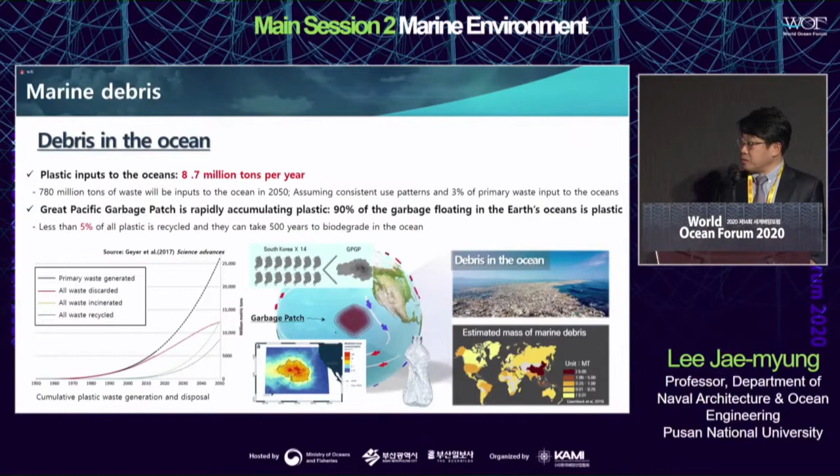I think you may be very well aware of the challenge of marine debris. Annually, 8.7 million tons of marine waste is generated, and more marine waste is accumulating in the Pacific Ocean. The biggest issue is that marine garbage is not biodegradable. We need to come up with a fundamental solution to this issue, otherwise we will face an overwhelming challenge.

This slide shows negative impacts from marine debris. As you can imagine, we have environmental issues and economic issues. Most people are concerned about microplastics. If wildlife consumes microplastics, devastating consequences will happen according to current reports. Indirect consumption of microplastics exceeds 800 MP, which has dire consequences for humanity and wildlife.

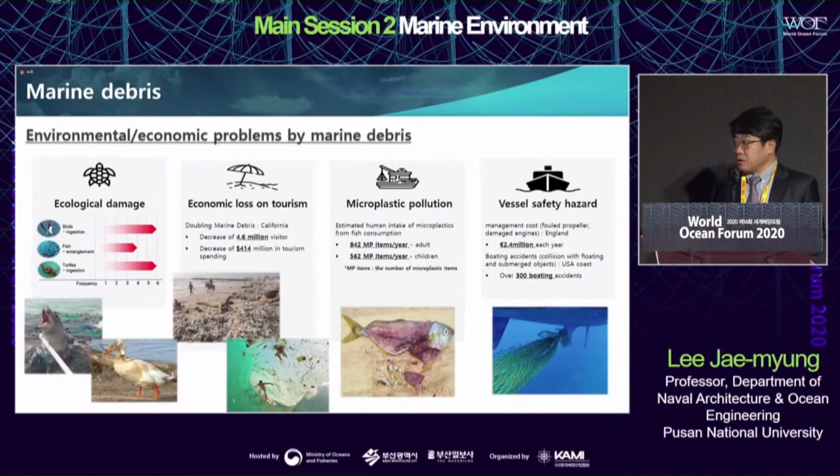Marine debris also has a negative impact on vessels, and it can have a consequential impact on shipping routes. We used to use a marine debris disposal process to clean up waste. Inland, the waste, after being collected, will be buried in landfills before being incinerated. For now, less than 10% of collected ocean garbage is recycled.

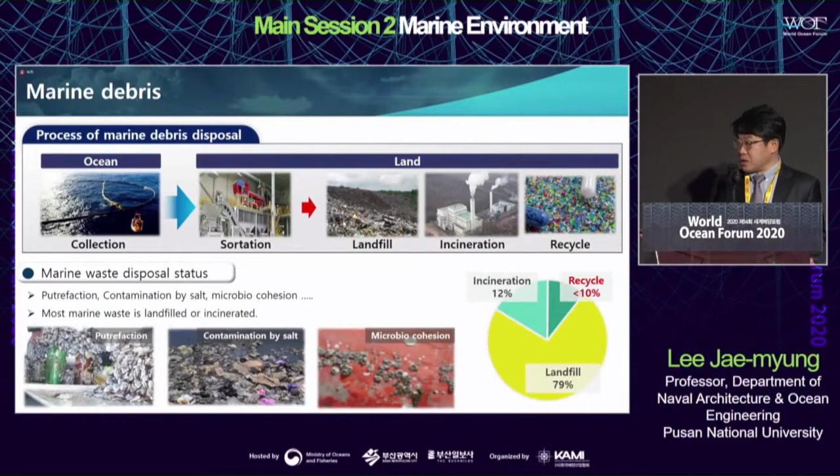Up until now, when we discuss the marine litter challenge, the most frequently used method or solution was collection, and it was land-based. For example, ports and streams have been the places where marine debris and ocean garbage have been collected. In those places, there have been some global systems or technologies in use, including unmanned systems, and there have also been projects on this issue.

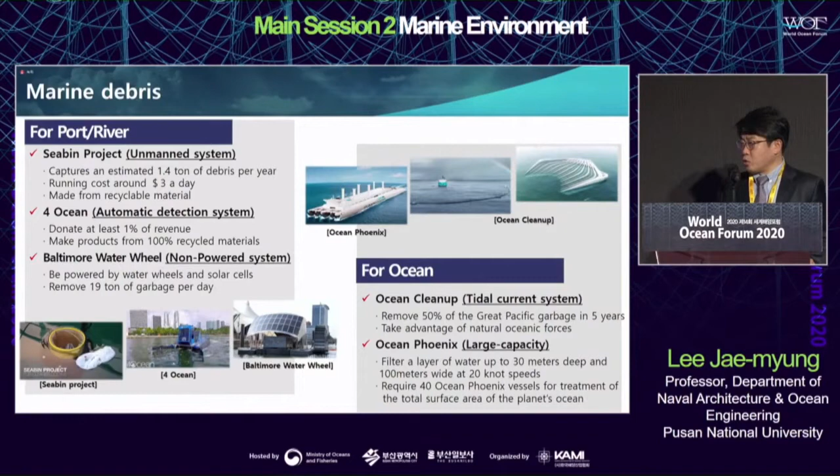For ocean cleanup, there is a foundation with the same name, Ocean Cleanup, and the wasteland in the Pacific Ocean has been a place where we collected ocean garbage. But as I said on the previous slides, most of these methods have focused on collection rather than disposal. Collection was their primary purpose.

Yesterday in the keynote session, I made this suggestion. My suggestion was LNG and hydrogen hybrid ocean cleaning ships, and these ships can be deployed to collect ocean garbage.

Ocean garbage and marine litter face three challenges, as you can see in the box at the top of the slide. The first is volume. When ocean garbage is brought in bulk, let's say you grind it, when you compress it, you can increase storage efficiency by 7 times and 16 times respectively. So this is how you should do it.

You should think about how you can efficiently and safely bring the ocean garbage onto land. Even if you successfully bring the ocean garbage onto land, you have to take the next step as well on land.

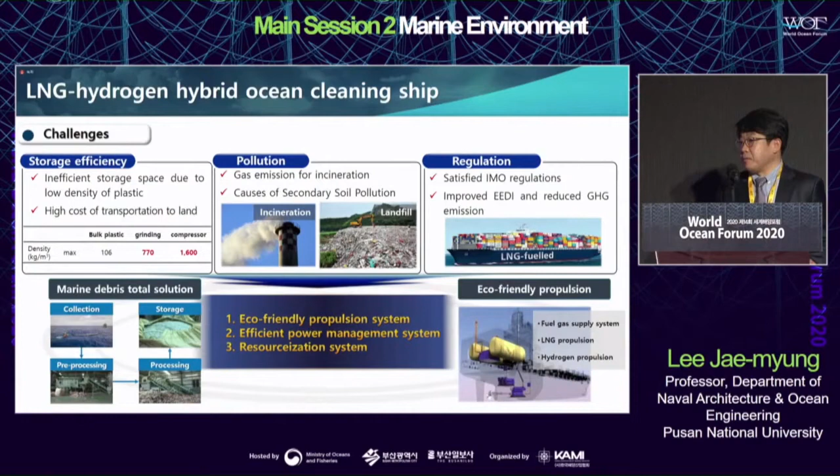Collecting and processing ocean garbage is currently done by trucks or vehicles, not by ships. But if we can use ships in collecting marine debris and marine litter, we can increase the efficiency. If we can connect all the dots and create the entire chain, we can achieve efficient power management and build efficient storage facilities. So when the ocean garbage is brought to land, the next thing you need to do is make it recyclable, and this will save you some costs.

Many ship experts have discussed this, and I also consulted them over this solution. This is a simulation result of my suggestion, and these are the dimension specifications of the ship I'm suggesting. This can operate from a place in Korea to the Pacific Ocean. If you think about the mileage or the route, this ship has the minimum level of specification required.

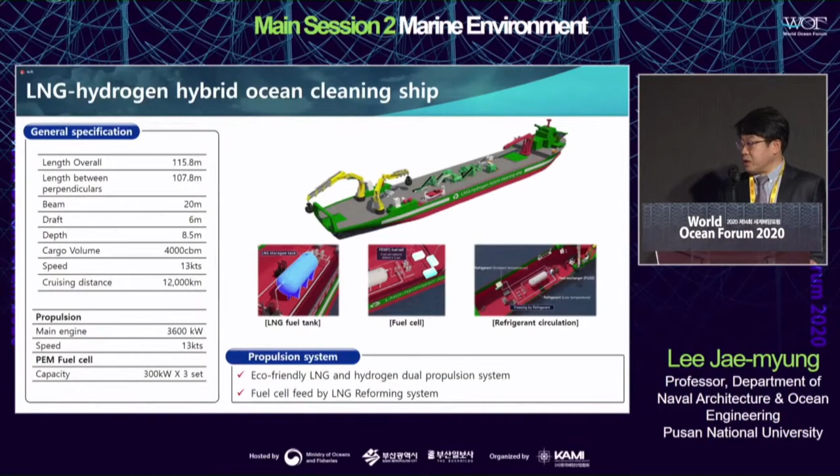If you mount an eco-friendly engine, if this ship is powered by LNG and hydrogen, we can also achieve saving of energy. As you can see in the simulation, the design is already available.

So let me go into details of the specifications and technologies required. The three big technologies are as follows. First, we need an eco-friendly propulsion system. Hydrogen fuel hasn't been used for a large ship operating in international waters.

So the third technology is to resource marine waste through recycling, hydrogen fuel cell, LNG, and cryogenic grinding. They can power the ship I showed you in the previous slide.

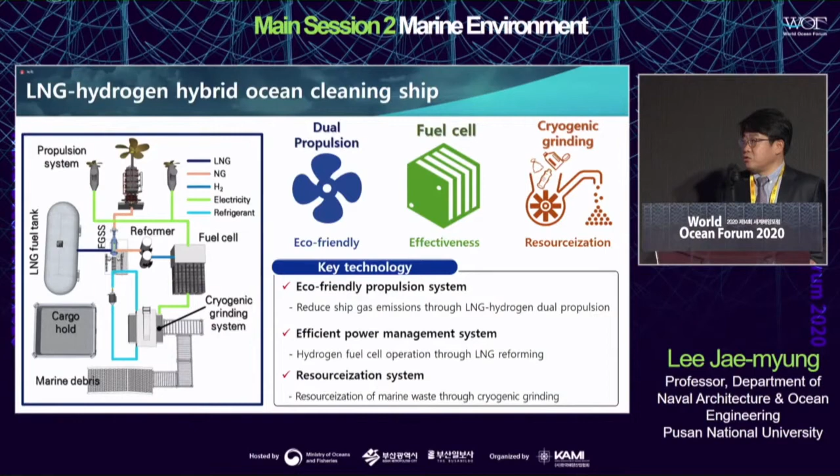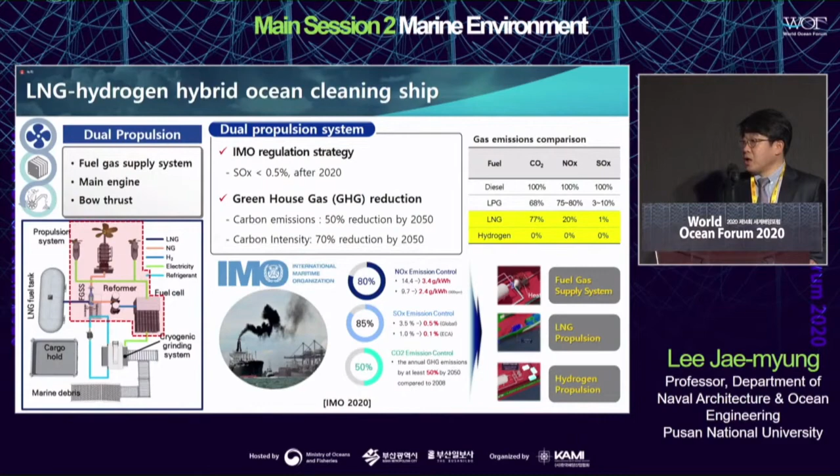The fuel gas supply system should be in wider use. They can be used for LNG propulsion. To give you more details, for fuel propulsion, fuel cell and LNG are the cleanest fuels. They are the fuels required for ships facing IMO compliance, and these fuels can contribute to making ships greener and more eco-friendly while meeting the requirements of IMO.

And LNG fuel tank can produce hydrogen. In the entire system, the hydrogen can be related to or connected to the hydrogen fuel cell, and on board it can provide power for all the systems on board, which means the most efficient power management can be achieved here.

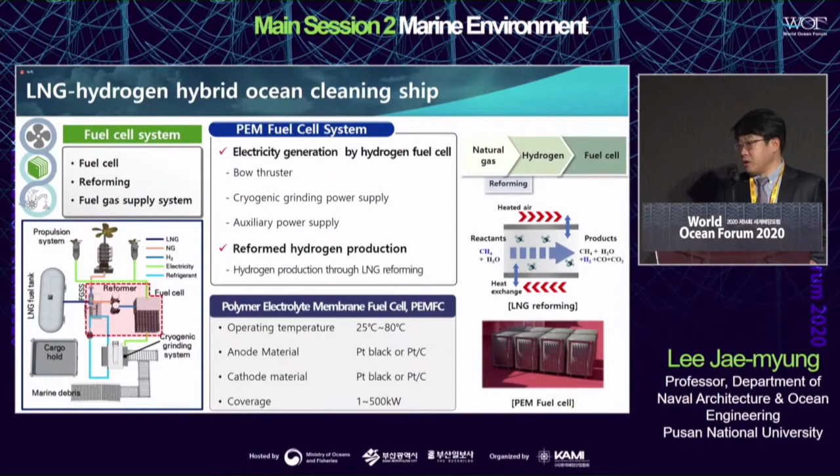The technologies I'm talking about are already commercialized.

Cryogenic grinding is the third technology I'm suggesting. In processing marine debris, one of the stumbling blocks is to grind the ocean garbage before bringing it to land in order to increase the efficiency, and in order to make it more storageable and easier to store.

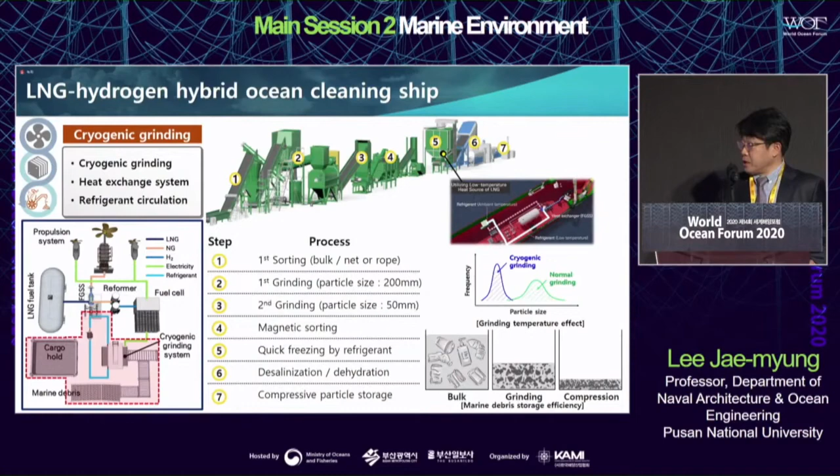Refrigerants or other materials or ingredients are required. LNG here can be wasted because after evaporation, LNG powered ships naturally emit or release wasted heat. But it can be recycled and reused for this technology.

So as long as we can combine and integrate all these technologies, the particles generated as a result can be used for recycling. Speakers after me will introduce you to cases or examples of recycling of marine waste.

Other examples include pavement materials or reinforced concrete, where this waste can be used after recycling. Another area we can use this waste is power generation.

We used to use fossil fuel to generate electricity, but it caused some concerns. The biggest example is CO2 emission, but if you use the hybrid method, it will save you the CO2 emission challenge and issue.

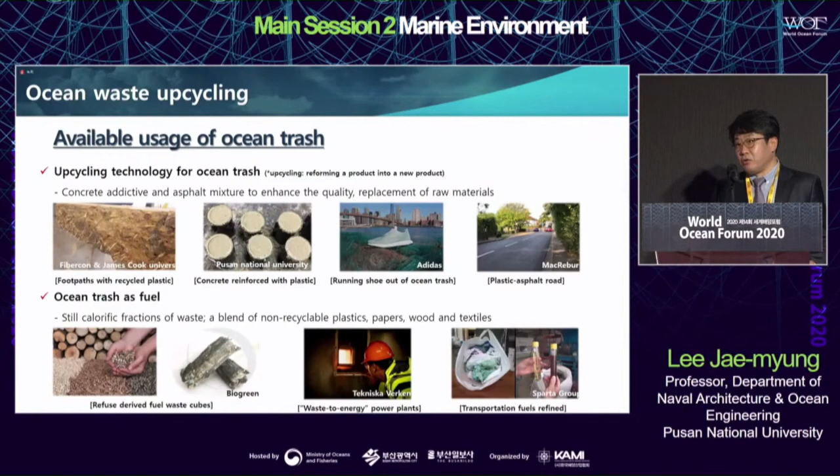And pellets can be made out of recycled ocean waste, and the technology required for the process is already in place. And if all of this process can come from the LNG-hydrogen hybrid ships...

So if a ship is powered by LNG and hydrogen, and if it can be used for ocean garbage, this is what we can achieve: we can pass down a cleaner environment to the next generation in the future. That's all I have. Thank you very much.